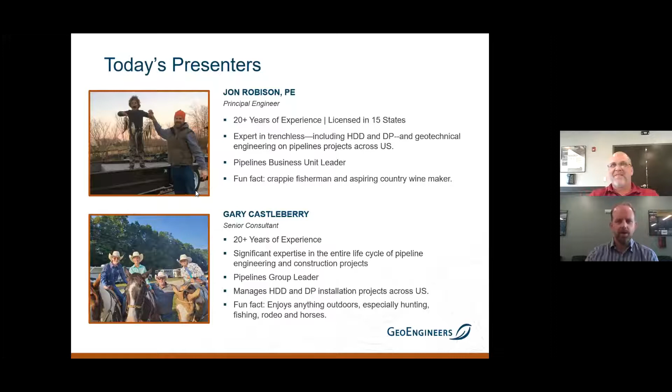Sounds awesome. So we like to start our presentations with a safety moment. And Gary, I'm going to turn this over to you now to give our safety moment. Okay, yeah, next slide. I took this photograph maybe in the 2007, 2008 timeframe. I was actually working for an owner, and we were installing an HDD. This is a 42-inch HDD in kind of a remote site.

So basically, we had a couple employees that were working together. One got called away for 5 minutes to go help someone else. And during the course of that time when he was by himself, something happened and he got hurt fairly badly. It wasn't life-threatening, but he was definitely hurt very badly. So we called 911, tried to get an ambulance out there. The fire truck came out first and determined an ambulance couldn't make it into the location.

So we tried to load the gentleman up into a stretcher, put him in the fire truck, and bring him back down. During that period of time, I worked with the firefighters to travel around to try to find a place to land a helicopter. Each time we found a location that was big enough, the helicopter would circle, and they were always reluctant to land because they were afraid flying debris would damage the helicopter.

So eventually we decided we had to turn off all the lights and move all the equipment that we could away from the exit pad, and land the helicopter on the exit pad, which is what you see in this image. That's our helicopter there, and of course the pipe string behind it. So we were able to medevac the gentleman and get him to the hospital, and he was there for a pretty good period of time, but he recovered fully.

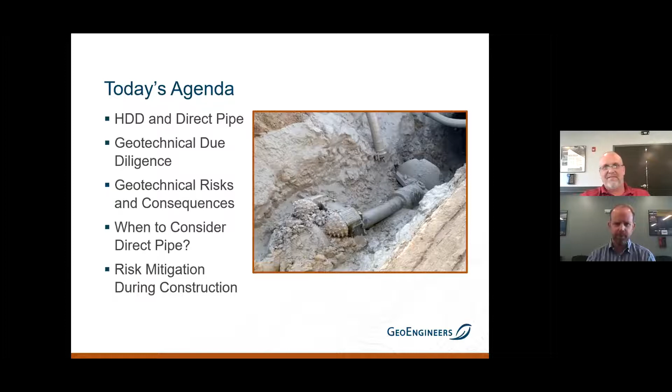Okay, so with that, if you're prepared to chat, we're going into our trivia question now. The next slide is going to be our first trivia question. With these, I've included a quote that has a lot to do with what we're talking about today, and then there's a picture of a famous geotechnical engineer, which I think is kind of an oxymoron, but for those in the business, you probably recognize this gentleman.

And I'll let April tell us if we've got a winner. We do. We have Travis Gerber. Is that how you say his last name? Excellent. That was fast. So fast.

Yeah, HDD typically begins by establishing workspaces on either side of the feature or the obstruction that you need to cross. We usually call them entry or exit points. The entry point is where the rig would typically be positioned, and the exit point would be where you would fabricate the pipe. On the exit point, you would generally also have some ancillary equipment, excavators, perhaps mud systems, and things like that. And then basically you just start drilling from one side to the other and punch it out on the exit side.

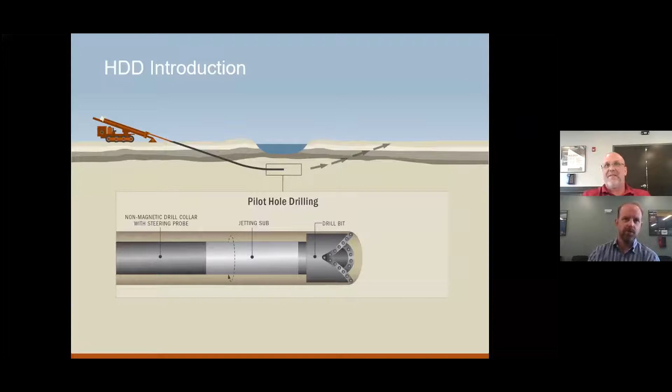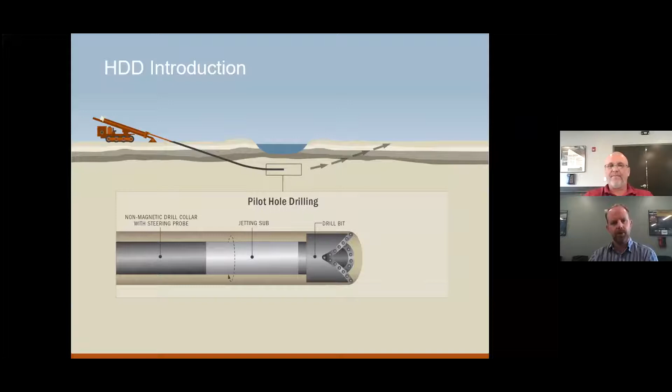Yeah, and that's one of the good things about the intersect. Oftentimes people use an intersect just to reduce those annular pressures, reduce risks. Right. And so after the pilot hole, typically the next phase would be to ream it out. Yeah, usually 1 to 4 or 5 passes, depending on the final size of the carrier pipe and the size of the tool you started out with, your pilot hole diameter. Right, and maybe a swab pass and then pull back, and then we're done.

So again, we're keeping this pretty short. Obviously, we do a lot of presentations where we go into a lot of detail on these things, but just a brief introduction. And again, the important things to take away from geotechnical: you have to have material that can contain those cuttings and the return. You have to have material that's not going to ravel and fall apart on you, and it's also not going to fracture on you. Yeah. And so it takes a special material.

Yeah, and I'd also say drilling fluid is incredibly important in all phases of the HDD operation. That typically goes without saying, but the rheology of the fluid is also very important. One of the things that I see oftentimes is people treat drilling fluid like a byproduct of the process, but in actuality, it's an integral part. You can adjust the rheology to get cuttings out of clays, where it may ordinarily be reactive and expansive.

Right. And that's a different fluid rheology than what you would have in a rock crossing, where you're just trying to get rock chips out, and the rock, especially like that igneous type rock, has a lot of strength and you don't really have to worry about fracturing the formation. There you're just trying to keep it in suspension and get it out. Yeah, absolutely. The chunks are typically bigger too, so the fluid has to be strong enough to suspend the cuttings and keep them suspended on the trip out.

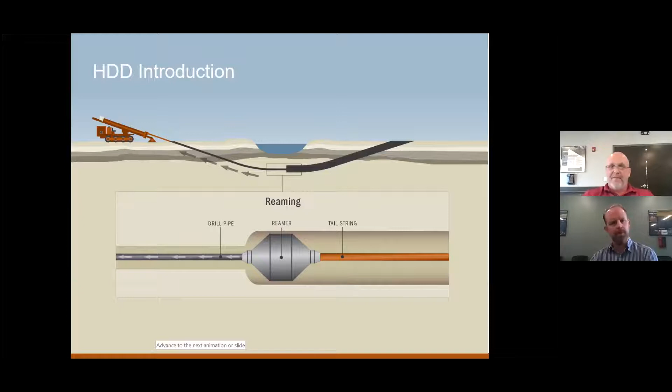Okay. So briefly on the direct pipe side, the direct pipe is similar in terms of the profiles that you can build. We often see direct pipes that are built along a previously designed HDD profile, but you can go shorter and shallower with the technology, because all of your cuttings return and all the fluid systems are within a steel casing. So everything happens within that steel casing, and at the face of the machine is where the soil or rock is excavated, combined with the slurry and then pumped back to the separation plant at entry. One of the differences is the prefabricated pipe string would be located behind the entry point, whereas with HDD, it's typically located behind the exit point.

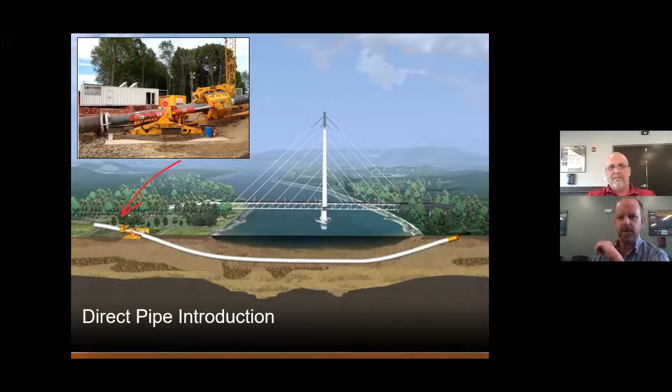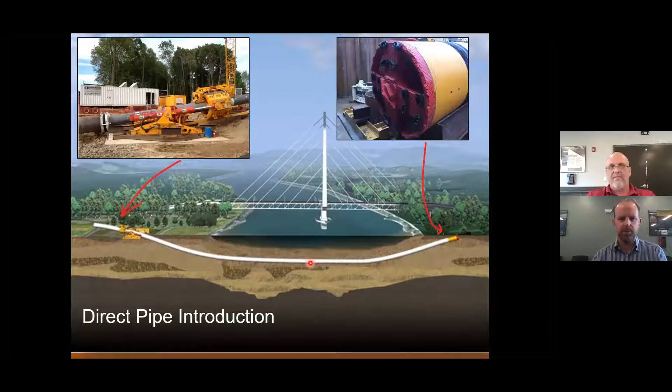A couple things on the equipment. The two main pieces of equipment we'll just mention briefly are the pipe thruster machine. That was the innovation that Herrenknecht came up with in the early 2000s. That allows the steel pipe to be prefabricated in long sections, and the machine has a clamp that grips on the pipe and thrusts it into the ground. And then on the leading edge of the direct pipe, this sketch shows one that's just about to punch out, so it's essentially complete. You have a more or less conventional microtunnel boring machine.

The other important thing here is, relative to HDD, the annular pressures are lower because basically it's just lubrication in the circuit. Yeah, much lower. You don't have an open hole, you have a cased hole, so you don't have to pressure everything up in that open hole to return the cuttings. And then you have the microtunneling excavation technologies that can handle some ground that HDD can struggle with, and we'll talk more about that. Yeah, absolutely.

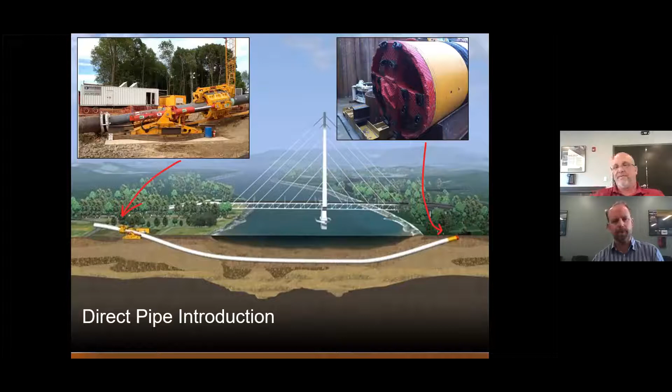Yeah, this is kind of counterintuitive if you think about it from an HDD perspective. Usually the smaller diameter pipe, the further you can go. Right. And it's kind of opposite with direct pipe. And that's one of the things I think a lot of folks struggle with. They think, 30 inch or 36 inch, we can go as far as you want to, but in reality, 1,000 feet-ish, 1,500, you're kind of up against some limitations there in terms of the equipment.

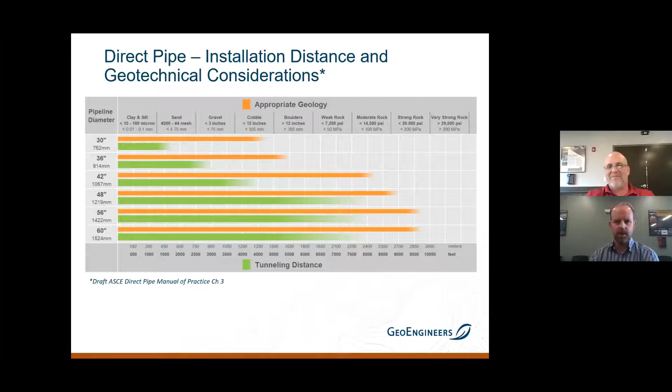It's easy to draw a line on a piece of paper. It's a lot more work to try and figure out if that's actually buildable based on what's in the ground. And the other thing about that too is you have engineers, especially people who are used to dealing with steel, and Poisson's ratio is always the same, Young's modulus is always the same, but in geology, soil mechanics and rock mechanics, it can vary dramatically in a very short distance. Absolutely. It really can and does. That's something to always think about.

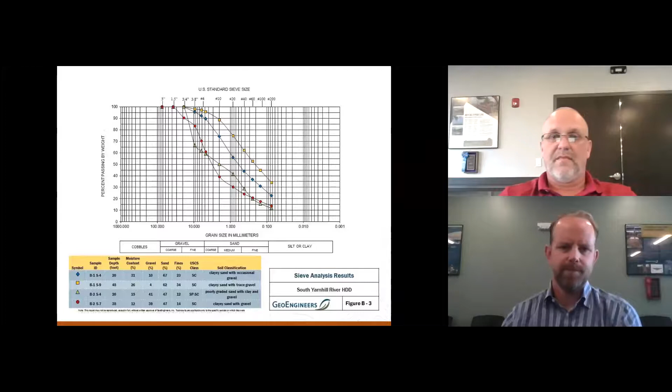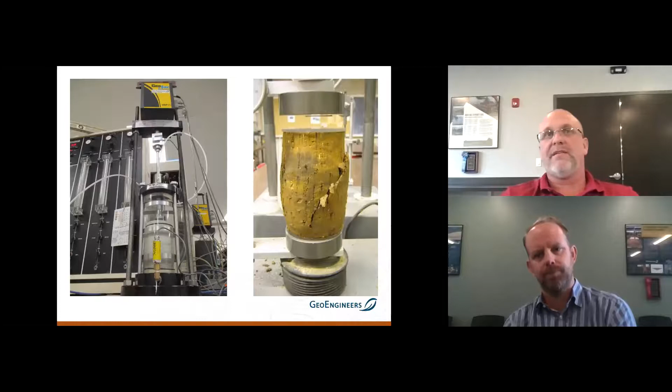And I'd say too, that a lot of folks don't understand, there are limitations in what you can do with certain test specimens. For example, if you do an SPT test, you're very limited in the type of test you can run. If you are able to collect an undisturbed sample with a Shelby tube or something, you're able to do a little bit more sophisticated testing. But yeah, that's absolutely true.

So kind of summarizing on the geotechnical due diligence, and this was a picture of a drill rig on a fan boat, which we rarely get to do, but every once in a while we'll even get to do that. But we want to look at doing some initial mapping, perhaps look at geologic hazards, landslide, those sorts of things, if it's applicable, karst. Those things all play into the construction risk and the risk of the lifetime of the project.

Once we think we have a handle on what kind of soil and rock we're expecting, then we do the geotechnical exploration. We'll look at groundwater. It's really important to understand, particularly if you have a crossing with an elevation differential, where your groundwater is at. We'll talk more about that in a moment. And then we look at some of those laboratory testing, index testing kinds of things that we just showed slides of.

And then if we do rock core, if it's a rock project, then we'll do unconfined testing and also abrasivity, which is a measure of the resistance of the rock to basically a steel tool. So how much tool wear you can expect and effort it's going to take to get through something.

And I think that one of the things, Gary, that we run into a lot is a question of what is the appropriate amount of due diligence? Right. And you hate to be the classic geotechnical engineer and say, well, you've got to use your judgment. But to a large degree, there is a lot of judgment in that.

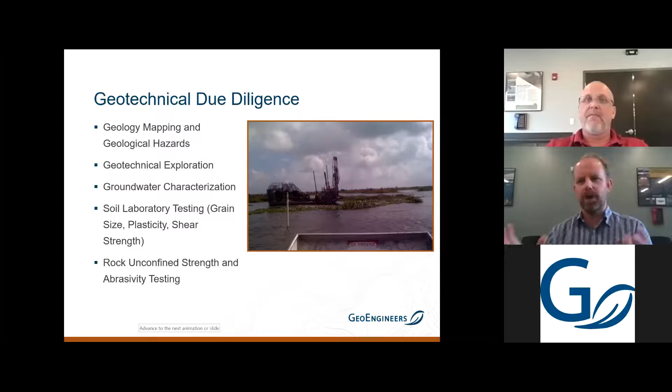Okay, so let's go into the first thing we want to look at from a geotechnical perspective and how it relates to risk: coarse grain soil.

And we're talking there about primarily not sand so much, but some with sand, but really gravel, cobble, weathered rock that's going to break down as you go through it and really act like a gravel and a cobble as you're trying to get it to come out of the hole. So let's look at this first.

The other point to make, I think, quickly is having an understanding of how cemented that rock is. So how stable it is when you go through it, if it's going to collapse on you because there's no fine material at all, or if it's going to be able to hold a hole open. Or occasionally out west, you can find caliche where it's chemically cemented. Right, right. So talk us through this photo here, Gary.

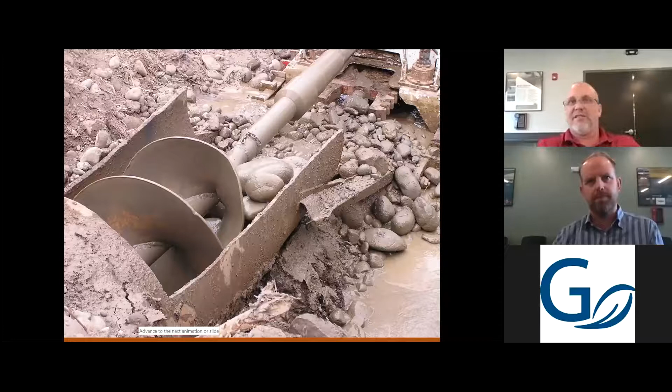And if you can see, those are river deposits or maybe glacial deposits, how rounded they are. They've moved a lot. And it's really difficult to drill a pilot hole in those. The tooling will actually ride up on them. They actually function like ball bearings. But you hit one that's large enough, and it'll push you up, and you can actually see it in inclination changes. Yeah, whenever you're getting onto something like that. Create a lot of havoc for the driller.

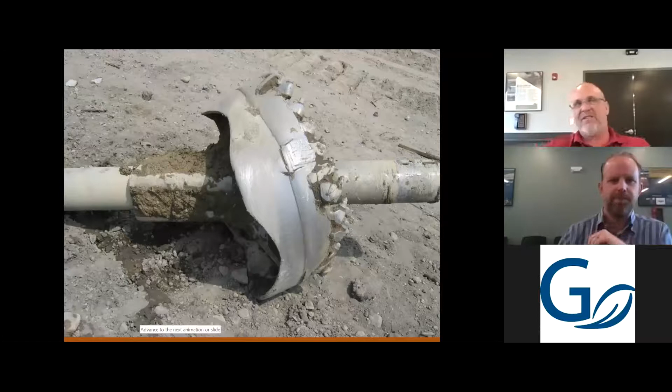So here we have a barrel reamer, looks like maybe got pulled past a boulder or something like that. Probably some cobbles or a boulder. And you wouldn't really see this in rocky ground necessarily, so it was probably an unexpected occurrence. You would ordinarily not run something like this in anything other than sands or clays or something. Basically, you're just trying to push the hole open, prepare it to receive the carrier pipe, product pipe, whatever. Yeah. Definitely some damage there too.

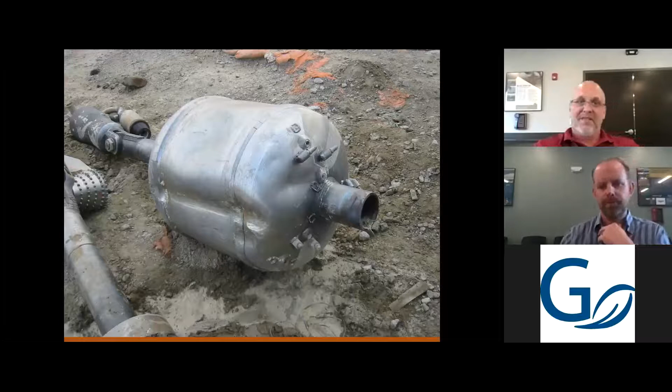Driller probably got hung up there as well. Yeah, it looks like it. Looks to me like this one, probably during pullback, perhaps the pipe got hung. Yeah. Ripped the pull head off. These are all things that you don't want to see on your project. Yeah, just to be clear. Whether you're the driller or the owner, when you look down in the hole and see that, it's a very concerning sight.

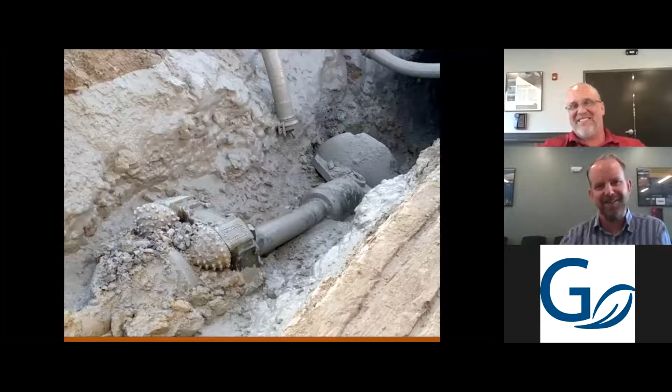Not a good day. But usually the exit side would let you know, like the pipe stopped moving. Right. Like, oh no. Because we're still moving over here. Yeah. Oh, we're moving faster now. Uh-oh. Yeah, but we're not carrying very much of a load anymore.

Yeah. So here's actual damaged product pipe. Again, something that's probably the result of bony material, rocks falling in the hole. It looks like probably some weathered rock right there. That looks like some weathered limestone or something to that effect on the left-hand side. And you can find a lot of that especially down in the Florida, Georgia area.

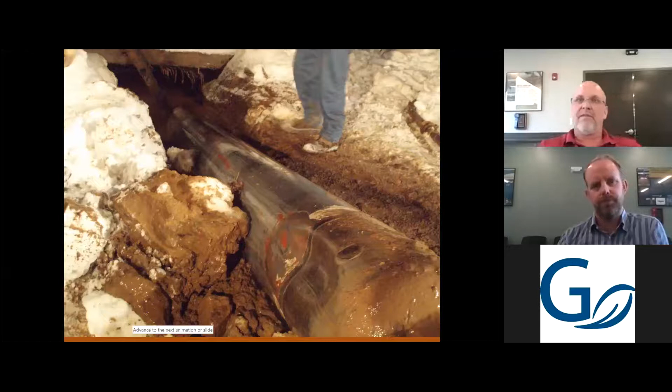Decomposed limestone tends to float up to the soil column, and you think you're above it through all your due diligence, you think you've determined that bedrock soil interface, but you can always find things like this, especially if you don't do enough geotech work. Right. And you can also do some geophysical work too, in certain instances, to help true up or validate what you're finding from your geotechnical explorations. Right.

This is another one from the same crossing that we had earlier with the cobbles coming out of the casing. During pilot hole, I mentioned earlier, you can start getting the bit to ride up when you're drilling the pilot hole on some of those larger cobble pieces. Oftentimes they'll just roll around, you can't get through them. So apparently here, I think we hit one that was a little bigger and couldn't get through it, and just pushed really hard on it and bent up a piece of drill pipe.

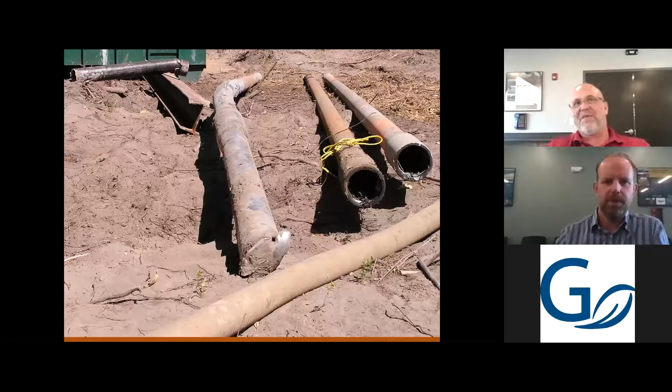And the thing about bending a piece of drill pipe is you never just bend one. It's usually a couple. Right. And they're very hard to get out of the hole. Right. So, talking about things that you might be able to do in construction. Obviously, the first one would not be in construction, it'd be before construction, would be to avoid a risky area. But there's also additives that you can use to help the fluid properties to carry the material.

Yep. The other thing too is if you do enough geotechnical due diligence on the front end, one of the avoidance strategies may be going deeper and getting into rock if you can find it, or something a little more competent. Yeah. And good point. Then isolating the ends with casing, the tangent ends, where some of that worse stuff is, the larger granular pieces. Yeah, that's a good point.

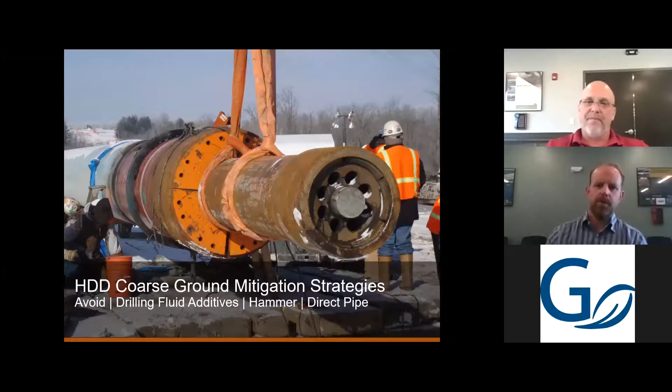Okay, so let's talk about fine grained soil. And again, I'm going to move faster because I see we're running short on time. Some of the things we think about with fine grains is more like how it's going to chemically react. Is it going to swell up when we hit it? Is it going to swell in on the pipe? Is it also going to be a risk of fracturing?

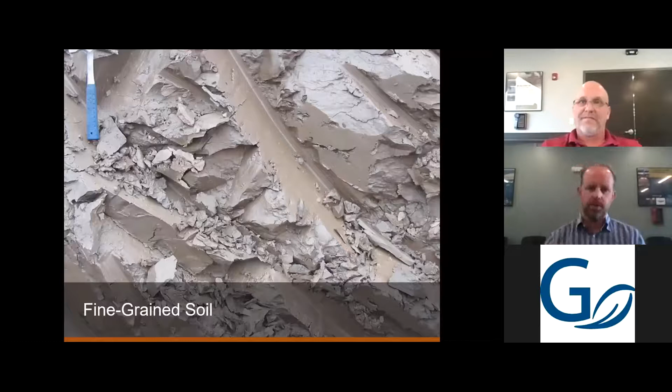Yeah. And really, if you think about a piece of clay, once you've fractured it, if you pull it apart or break it, it's done. Sand, you move it around and it just gets into a denser configuration between the grains. Clays, you fracture them, they're done. Yeah. And so those are primary risks we see with fine grained soils.

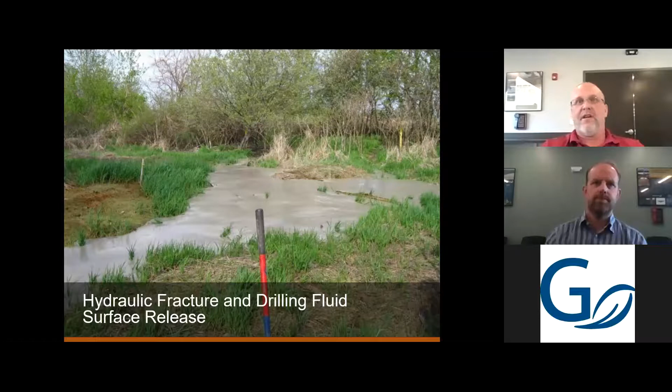Yeah, and going back to my history in the industry, and you've probably seen this too, when I first started around 2000 or so, very little was done to assess these risks. And we've had some occurrences over the last 6, 7, 8 years that have really driven it to be more due diligence and the actual correct kind of due diligence as well.

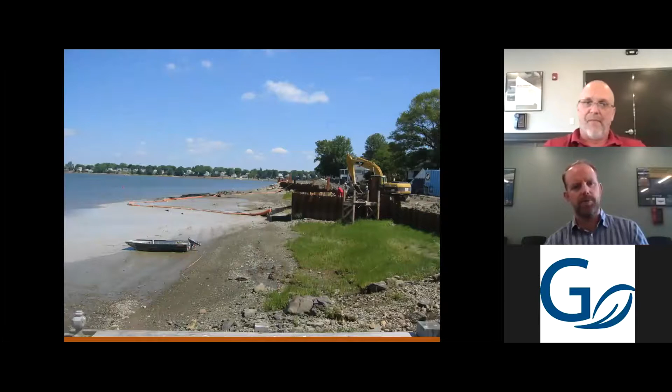Right. So this is another example. This is a shore approach. We see we've got an inadvertent return out into the lake there. This is one in a neighborhood, and we were joking earlier, Gary, anybody that cuts their bushes like that is not going to want to see an inadvertent return in their front yard. I mean, nobody does, but this is obviously a pretty particular person.

Yeah, we've always said in the industry, over my time in anyway, the fluid on the grass helps make the grass greener, right? Well, I'm not sure if the person that owns this place would believe that or not. They're not buying that. Yeah.

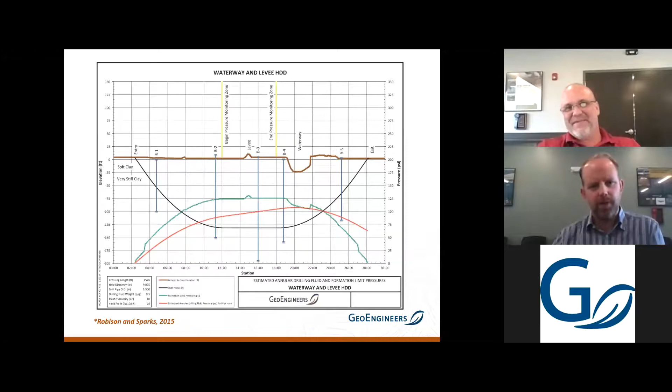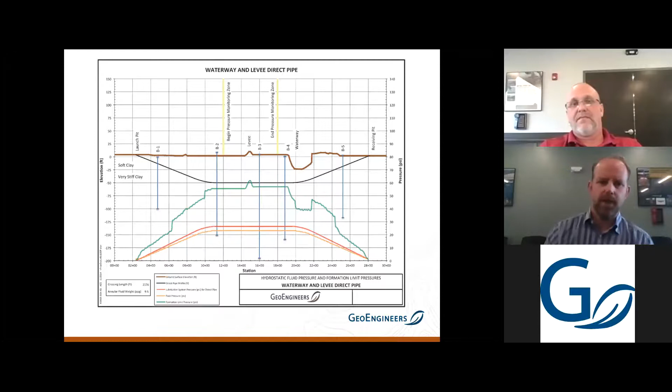So one of the things, and I'll just mention it, we don't really have time to go through these figures, but one of the things that we do with direct pipe, we mentioned the pressures are a lot lower. It's a mitigation, and we've seen several levee drills where we couldn't get the HDD to work. We did a direct pipe and reduced the risk thereby. And we've got a couple of those kind of projects actually going right now. And so that's, again, a potential mitigation for hydraulic fracture risk.

Again, the number one would be avoid, and then always prepare for it, have the supplies on hand, the equipment to deal with it should you have one. We always recommend monitoring pressure during pilot hole, and see if that pressure is looking like what we expect, or are we seeing spikes? That could be indication that your hole's not very well cleaned out. We need to do a better job of keeping the hole cleaned out.

Yeah, production rates too. If you compare production rates and the trends, the annular pressure trends, those are good tools to use to make informed decisions on the driller's behalf. Yeah, and then we mentioned earlier pilot hole intersect, and then direct pipe as ways to keep those pressures down. If your formation can't handle anything, maybe you can't even get one of those to work, but those are all tools in the toolbox to reduce those pressures.

And fluid rheology is really important in fine grained soils too. That's one of the things where if you're going to have a mud engineer on site, that's the place to do it. Yeah, for sure.

So moving on to profile elevation. So this is kind of a design risk, a geometry risk, but it's directly related to geotechnical risk in that depending on the soils you're going through or rock, this may not be a big deal, or it may be a huge deal. And so a couple of things that we look out for are, do we have perched groundwater? So this is actually a drill we designed in Iowa. And I know you thought Iowa was flat, but there are some places in Iowa. At least one hill there.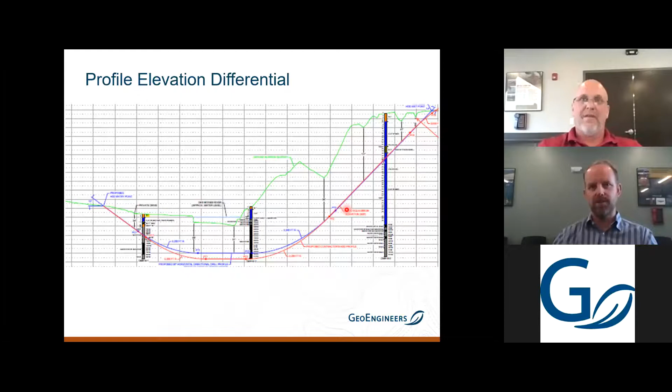So anything above the elevation of entry is called dry hole. It's above the fluid equilibrium point. So another very important thing to keep in mind when you've got significant elevation difference, as we're showing on this slide here. And this one, actually, we did end up with a sinkhole towards the top. We had to do some additional things during construction to mitigate some of the things that were happening. We did get it in, but it was definitely one that was challenging. Yeah.

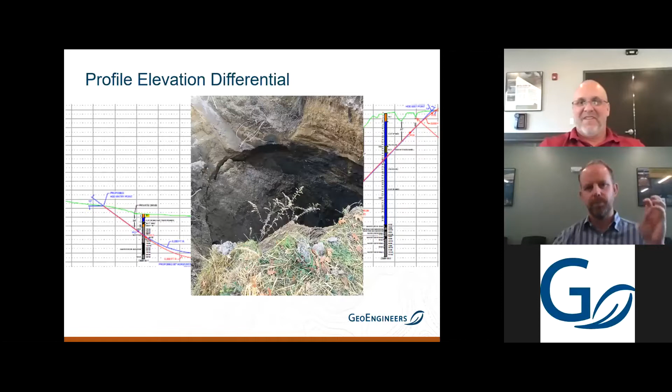And if you combine that situation with fine grained materials where they flocculate, create clumps and start running down. Yeah, it can hold fluid up until it flushes, and then you get a lot of drilling fluid. Yeah. And we'll talk about that in a minute. But yeah, so this is a crossing in Utah that we got called out on, and this is a sinkhole near a highway. In the background, there's an interstate.

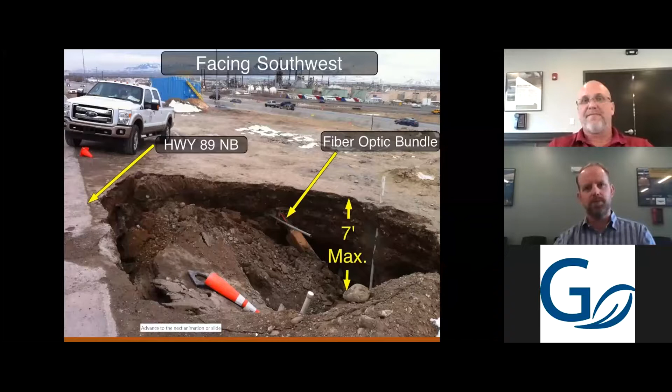So obviously, with these kind of things, not only are we disturbing the ground surface, we've also got life safety things. Yeah, and so we have to really be serious and considerate of how we approach these. We want to protect the public. It's our first duty. Yeah. A lot of times the pavement will bridge something, and it'll be a catastrophic failure that won't give you any warning.

Right. So I mentioned the groundwater. Talk us through this slide briefly, Gary. Yeah, this one, I think this one was also one where perched groundwater was intersected. Yeah. And basically, once... Trying to control it, and it's going everywhere.

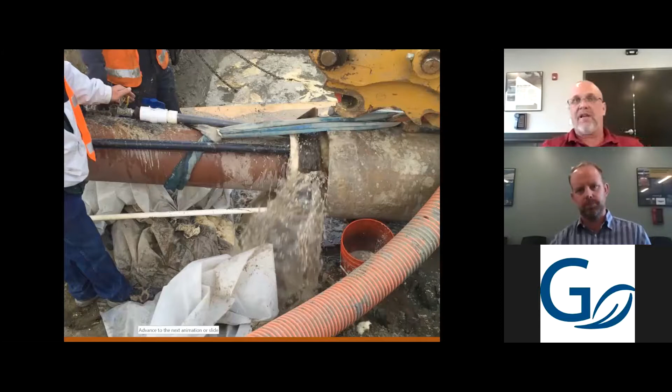And yeah, you just have that elevation head on your water, and sometimes there's very little you can do with it. Yeah, especially if it's coarser granular materials, and you get a lot of precipitation or something, it's going to be constantly recharged. Yeah. And then the owner would probably have to do something dramatic here to manage groundwater for a period of time. Or you could potentially grout, but you never know how effective that's going to be.

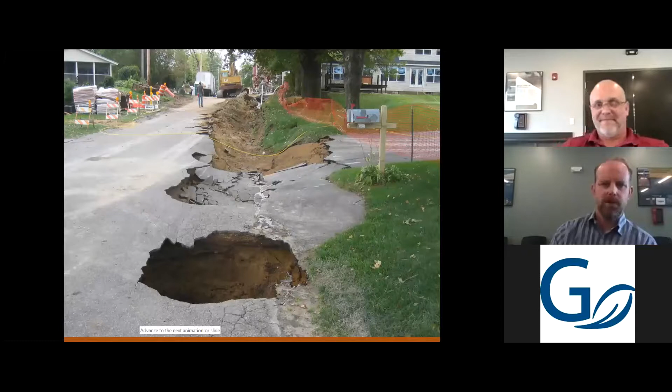Yeah. So I'm going to go through these next couple slides really quickly. This is obviously in a neighborhood. We've got an elevation differential, and we've got some pretty good sinkholes there, some of that dry hole again. Yeah, some of that dry hole. This is in a park, and this was in Washington State, out near Auburn. A very big elevation differential there.

And I think we show that on this. This kind of gives you a sense for this same project; these last three slides are all the same project. This is at the top of the hill looking down over the river onto the drill pad. And you can see we were prepared here to handle the flush. But the dry hole in the earlier slides created a whole different set of issues. Look at the size of that pit to contain the hole flush.

That was probably 250 by 200 or something. Yeah, it was humongous, but that's what you have to plan for. You plan for the volume in the hole, and it's probably going to come all out on you at once. You've got to prepare. I think we assumed that the hole is going to flush at least twice during each pass. So we built the pit accordingly, and we also bermed around all the equipment with Jersey barriers.

And from the actual mud pit in front of the rig, we put a 42-inch casing in as a culvert that led to this pond here, so that if something happened, we could abandon ship, get out of there and let it handle itself. A lot of thought into that mud handling.

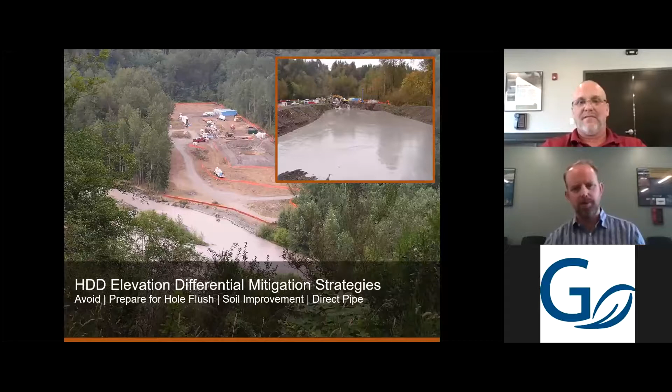So again, just to summarize on the elevation differential, first avoid, and that may go back to routing, and then prepare for the hole flush. There might be some things you need to do to the soil in the dry hole area to improve it so it can handle the HDD better, or you might have to look at a Direct Pipe there too.

And the Direct Pipe piece is an important thing to think about too. You probably remember a few years ago we had a Direct Pipe we were helping out with, and the elevation differential was so significant that, because of the seals on the MTBM canister itself, we had to drill it from one end or the other. We couldn't do both, because of the elevation differential and the pressure put on the seals.

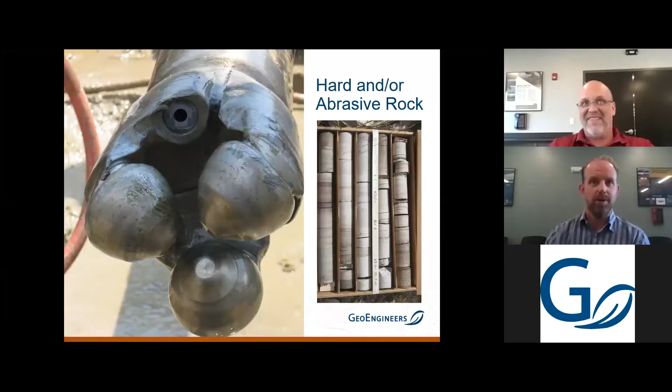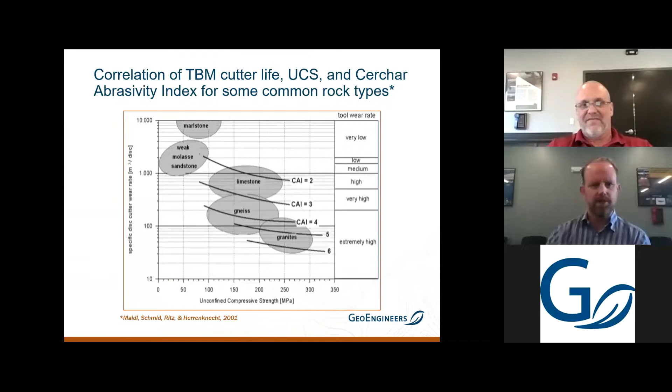Right. So we'll briefly mention hard and abrasive rock. I think that's probably pretty easy to grasp. If you can't cut it with steel, or it takes a long time or uses up a lot of tooling, then that's your hard and abrasive rock. So this is a pretty good graph correlating abrasivity and unconfined compressive strength. If somebody's interested in that, reach out to me, I'll get it to you. This is an example of some tooling that had some section loss just from going through some abrasive rock.

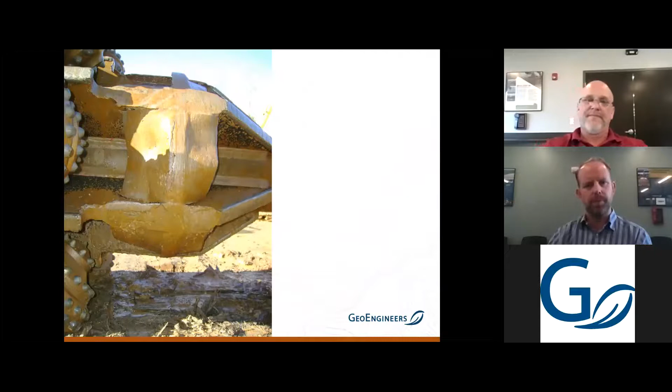Yeah, in hard and abrasive rock, the production rates are going to be really slow. So you're going to have a lot of reverse bending cycles. You're not moving the drill pipe very fast. So you're losing metal at the same time that you're having these reverse bending cycles, so it can lead to a lot of fatigue as well. Right. We've got a couple of shots here of equipment that's getting worn down by rock. This stuff is just getting killed by rock.

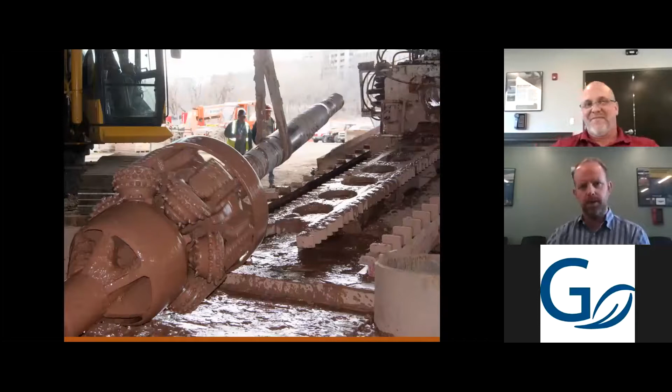And then this is what I mentioned earlier; this is most likely a fatigue failure based upon where it is in the string. So it's important to think about your tooling going into some hard and abrasive rock. How often is your drill pipe inspected? Are you going to have it inspected again during the process? There's a lot of things to think about there to set yourself up for success.

And so then we get into pullback and some things to consider if you've got a bad hole or just abrasive rock, abrasive ground: your coating and even metal loss of your pipe. Yeah, coating damage. You shouldn't go into a rock crossing thinking you're not going to have coating damage. And in the previous slide, you saw some metal loss in there too.

In certain instances, you may have chunks of material left in the hole or cuttings that are pulled into a low spot. When you pull the pipe across that, you could see not only coating loss, but metal loss. Right. And then your pipe might not even be acceptable for the job it's supposed to do. Or you may end up having to pull more pipe through. One of the things we've done in the past is UT testing on the pipe when you see metal loss, just to make sure you have that wall thickness. Sometimes you may have to pull several joints until you get a couple that you can use.

So your pipe's wearing the rock out and eventually it'll flatten it out. That's an expensive way to wear rock. Yeah, it is for sure. So summarizing on the hard and abrasive rock: avoid if you can, though it's not always possible. Plan for long duration, plan to have a lot of extra tooling. You are going to have to change it out.

And then additional coating. And this is actually a picture of a fishing tool, getting ready to go fishing. Yeah, fishing's not fun whenever you put it on the front end of a drill rig. Right. That's what happens when a roller or a piece of metal gets knocked off your tooling because you're in rock and your stuff's wearing out, and you can't leave that in the hole because you don't want to pull your pipe over it. Yeah, you can lose cones, and as shown in one of the earlier slides, the centralizer on the front of the reamer was very thin. I've even seen centralizers come apart where the metal loss is so dramatic that they're just worn out and fall off in the hole. Right. Those are very difficult to fish out.